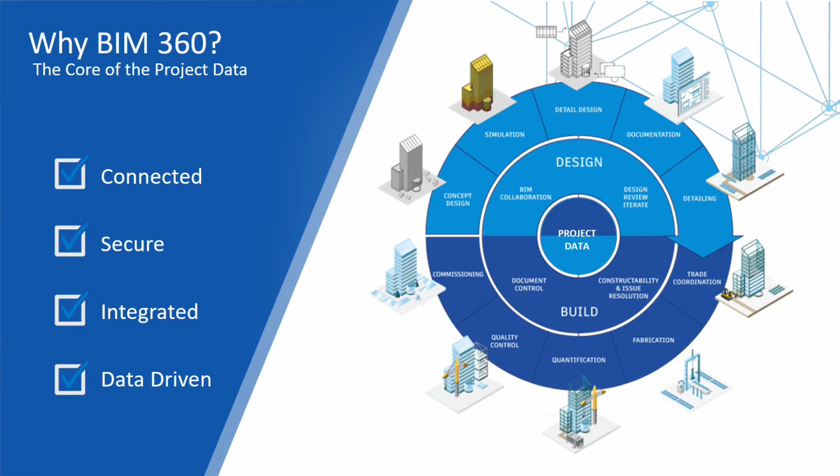BIM 360 changes the way teams stay connected, both in the office and in the field, by allowing easy team communication and collaboration. This is done through the web and mobile anytime, anywhere, allowing teams to collaborate throughout the entire project.

With your security as a priority, BIM 360 is designed and built using best-in-class cloud software practices and is powered by Amazon Web Services, the world's leader in cloud infrastructure. BIM 360 has a 5-tier permission control as well as a 2-factor verification option.

That being said, BIM 360 is designed to be extensible with open secure APIs to easily connect other construction software tools to your company uses. It is a streamlined, integrated solution with viewing support for over 50 design file formats, specialized capabilities for PDF, AutoCAD, and Revit, and support for managing any project file type.

BIM 360 is data-driven with the Project Insights tool. BIM 360 supports predictability and certainty of decision-making, eliminating the root causes of uncertainty. Imagine the impact on project delivery success and your business's profitability if there were less complexity, disconnection, and uncertainty.

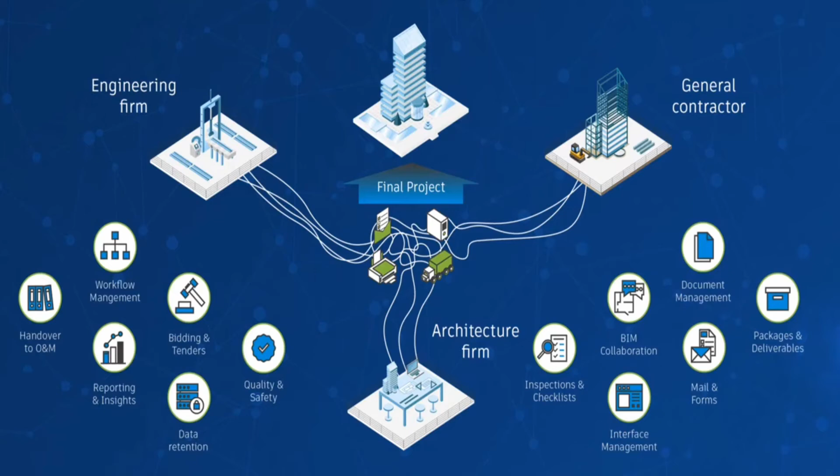As the data is being saved into BIM 360 Docs and we share a package, it means we now have a mechanism in place to securely transfer design from one discipline to another through a process that is completely traceable and auditable.

This is what we call a package. Think of it as a milestone delivered by an AEC discipline at a certain moment in time. Once a package has been created, the other disciplines can consume it so that they can reference it in their own discipline's design, after which the whole process starts again.

Let's have a look at the components that come with BIM 360 Design. There's the integration in Revit with the same powerful C4R technology with integration to the cloud. As data is being stored in BIM 360, it makes use of the document management module with its ability to add permission for viewing and also allowing non-Revit users to view and interact with the teams.

Lastly, as data is being communicated between the teams through the form of packages, the design collaboration will show the flow of packages in BIM 360 in a very visual way.

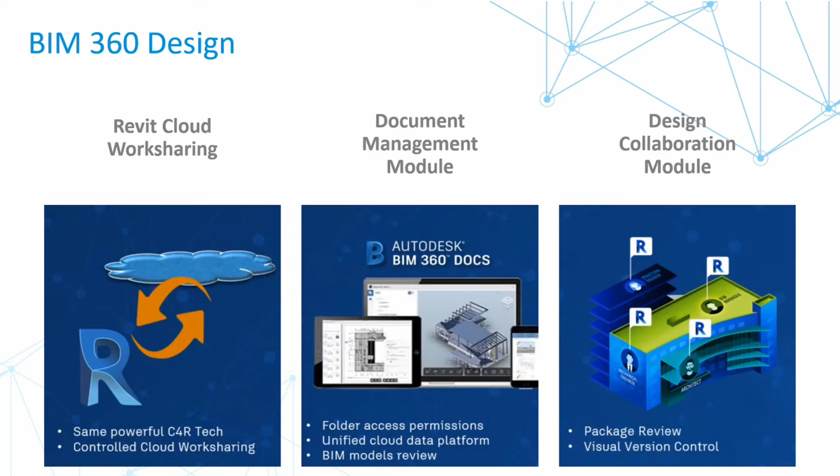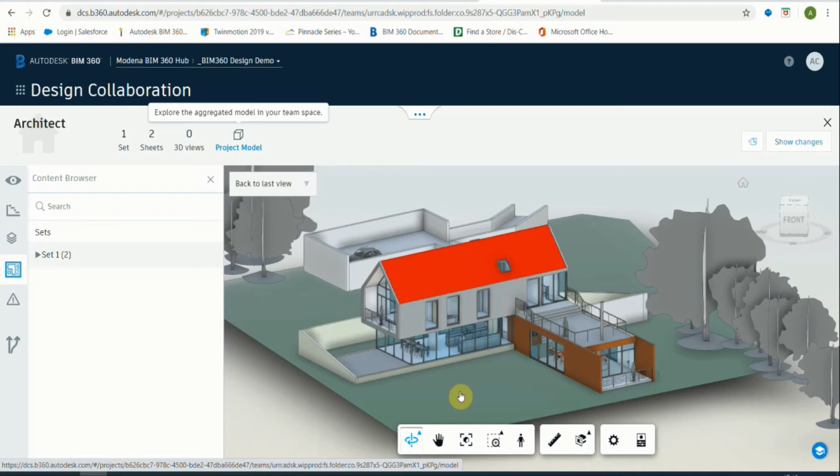As we can see here, when we choose to collaborate within the cloud and add a set with the views and sheets that we publish within Revit, our model is uploaded and ready to be viewed in BIM 360 Design, where we can freely navigate around our model.

This also updates our document management module with the latest drawing and its version.

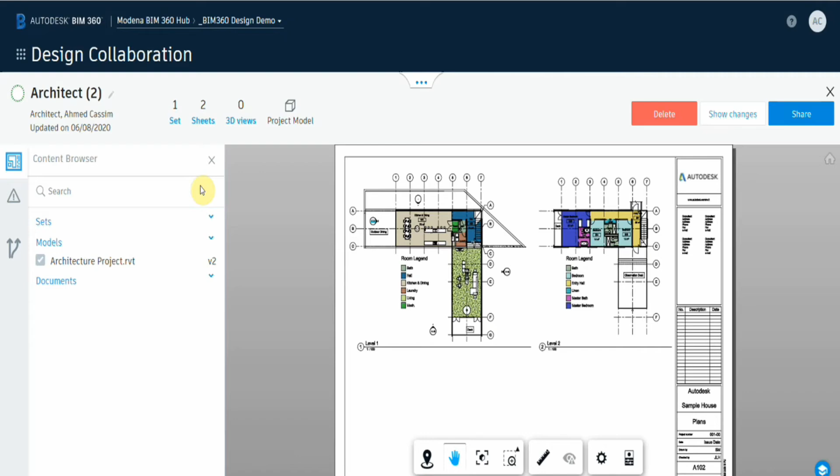When, for instance, the architect creates a package for the structural engineer to review and consume, BIM 360 Design creates swim lanes as visual indicators to the structural engineer that the architects have in fact published a model on this specific date ready to consume. The structural engineer will review the contents and consume the information.

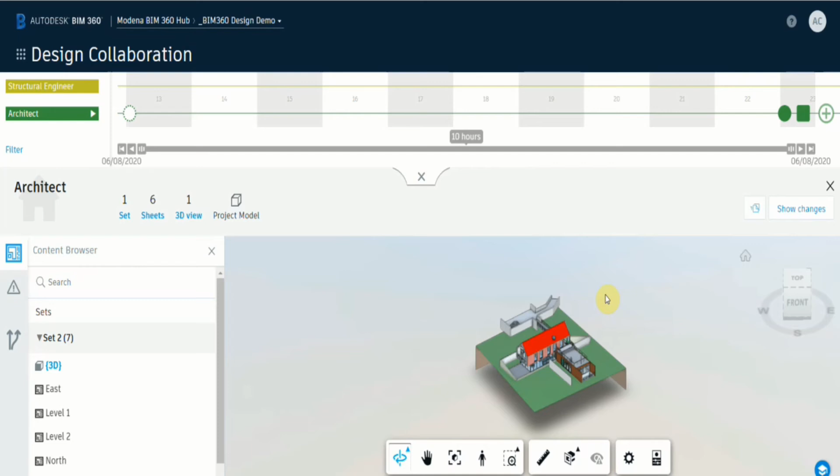The new 3D views and sheets will be available for the engineer to then review and see changes that have been made in comparison to the previous versions. For example, all elements that were added will be highlighted in green, elements removed in red, and elements modified will be in yellow, with the ability to filter through every affected component within the model.

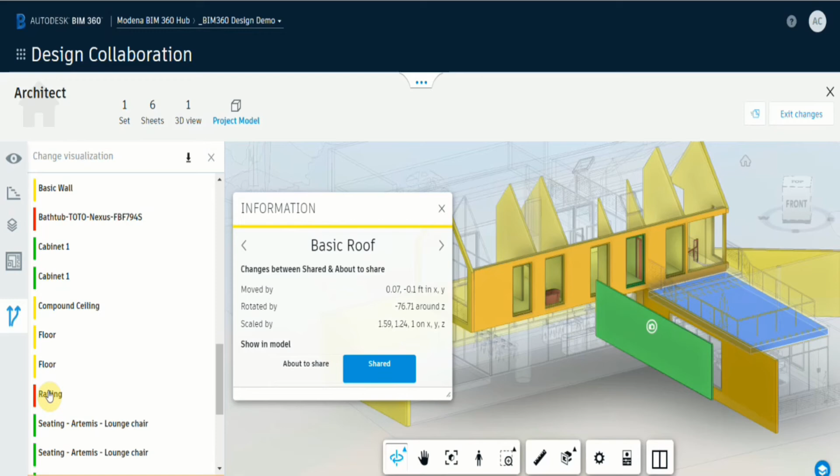Views can be filtered to show only added, removed, or modified. You can also filter by the different disciplines, how the architects, the structural engineers, and the MEP discipline is affected, with which element and how many elements have been affected.

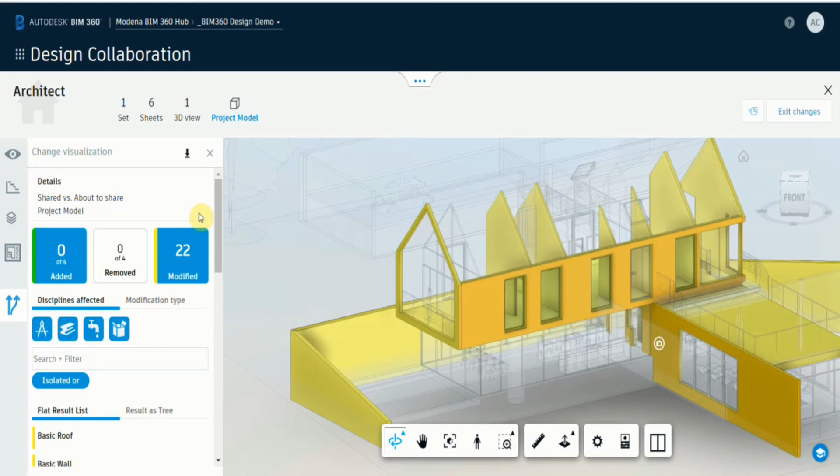The review process has all the tools necessary for all consultants and designers, such as measuring, sectioning, and checking object properties.

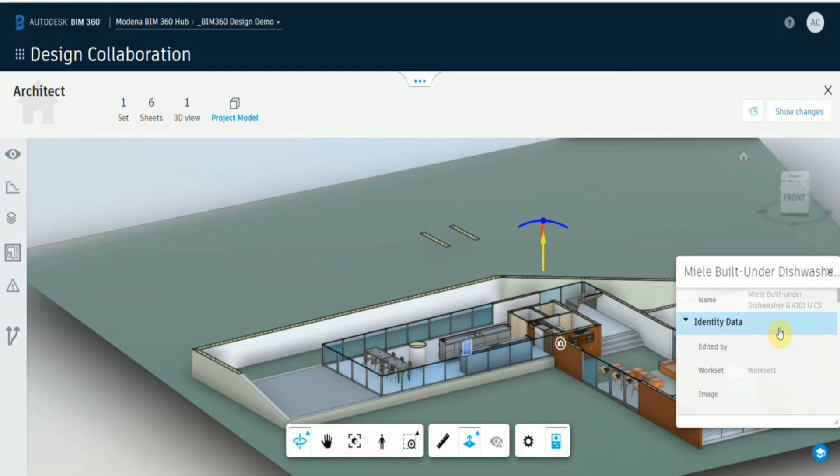Now back in document management, under the structural engineer's folder and within the consumed folder, you will have the new architect's model and its current version and changes.

Now, if for instance the architect wishes to link the latest iteration of the structural engineer's model into their model, the architect can simply link in the structural model from BIM 360 directly into Revit.

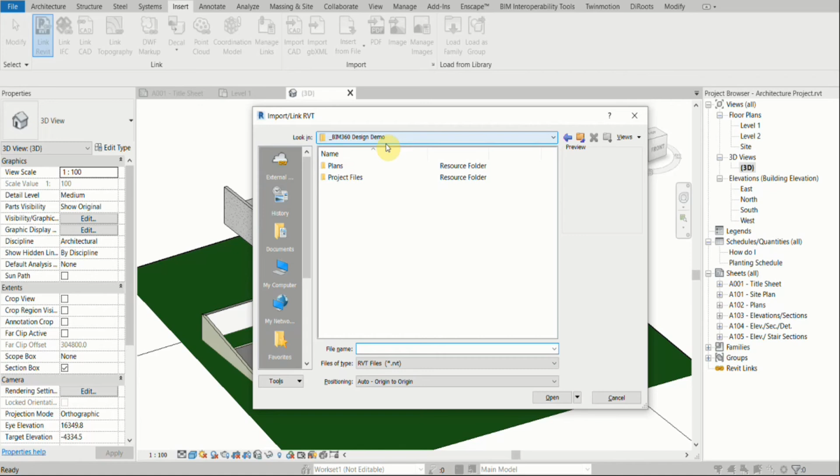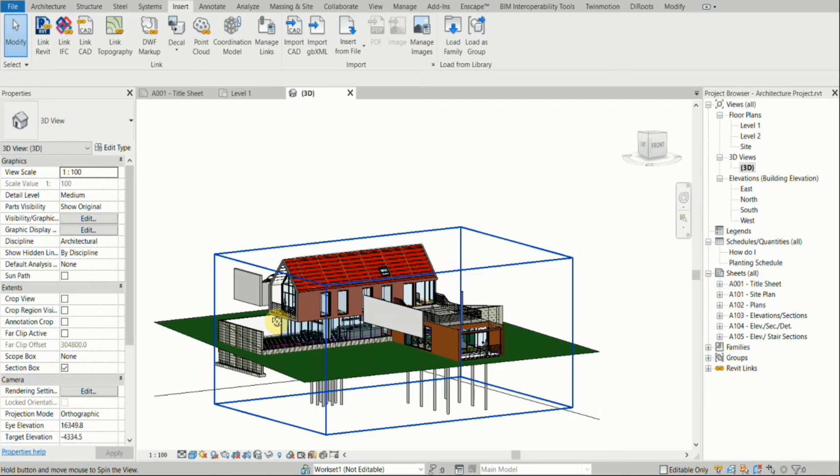Have a look at the structural model now linked in. If we go to manage our links from within Revit, notice that the path for the structural model is pathed to BIM 360. That is, it is within the cloud.